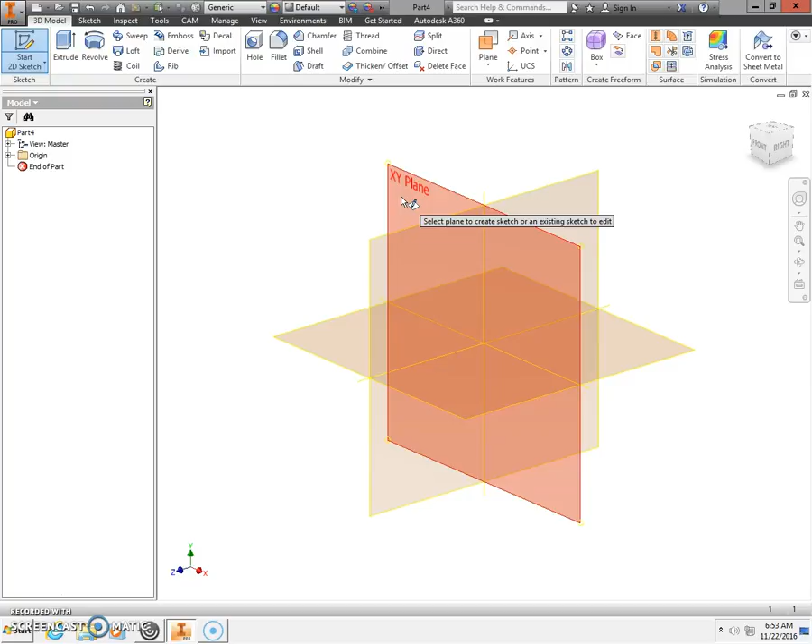Today we're going to create the cover for our iPad amplifier. We're going to begin with New, Standard IPT, and click Create. Select 2D Sketch from the ribbon bar at the top. Place it on your XY plane. We're going to click Front to zoom out.

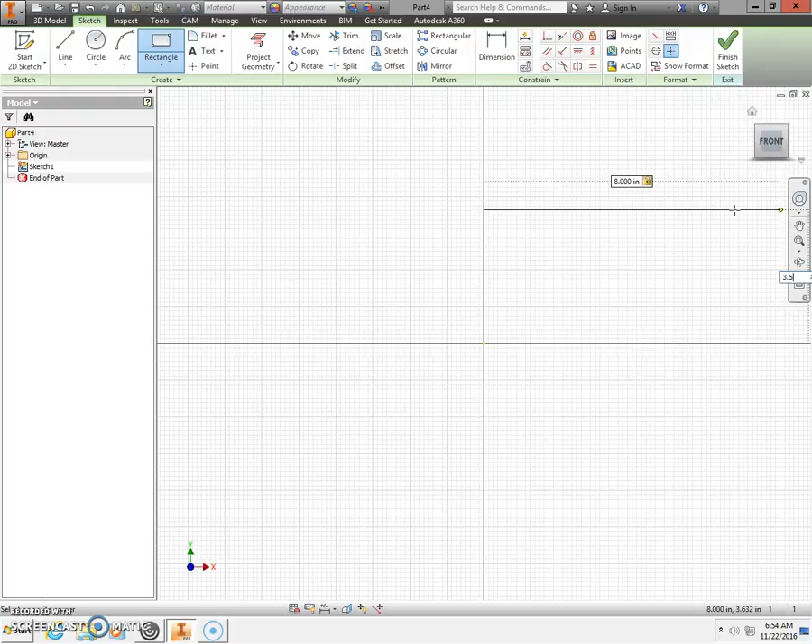I'm going to select my rectangle tool from the ribbon bar at the top. Go to your origin, wait for your green dot, stretch out a rectangle to the upper right hand corner. My horizontal dimension is 8, press the tab key. My vertical dimension is 3.5. Press enter on the keyboard. We're going to finish sketch and go home.

Next we're going to extrude. I want to extrude in direction number 2, and I want to extrude a distance of 1.875, which is 1 7/8 of an inch. And click OK.

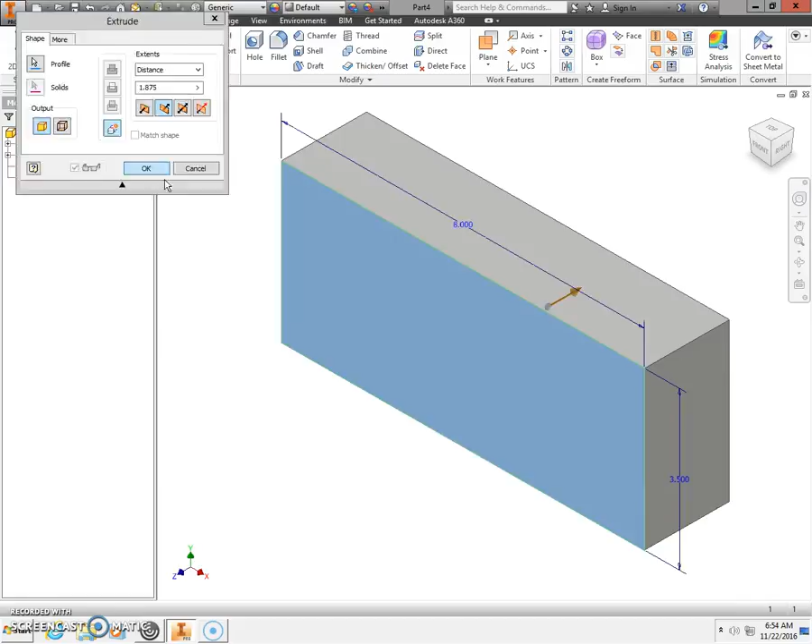Next we're going to take a 2D sketch, place it on our front view, zoom all once again, and I'm going to begin with my rectangle tool. I want to start on the edge of my workpiece. Once that's highlighted, I'm going to stretch a rectangle over to the right hand side. My distance for my horizontal dimension is 8 inches.

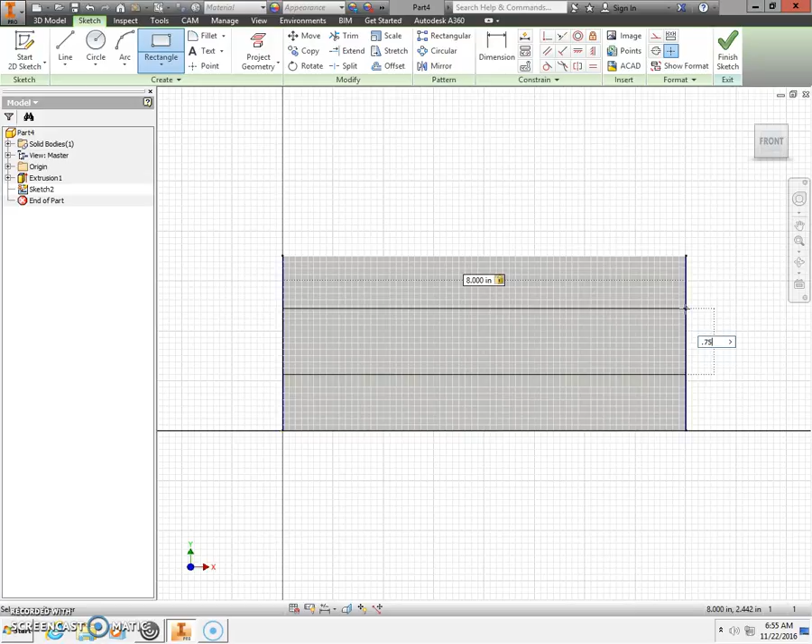Press the tab key. And this next dimension you're going to type in is the width of your iPad and the case together that you measured in class. For mine, 0.75 is what my iPad and case dimension is. Press enter on the keyboard.

Next we're going to locate this, so we're going to click and choose our dimension tool. I want to go from the bottom of the rectangle that we just drew to the bottom of your workpiece. This dimension here is going to be 1.63. Press enter on the keyboard.

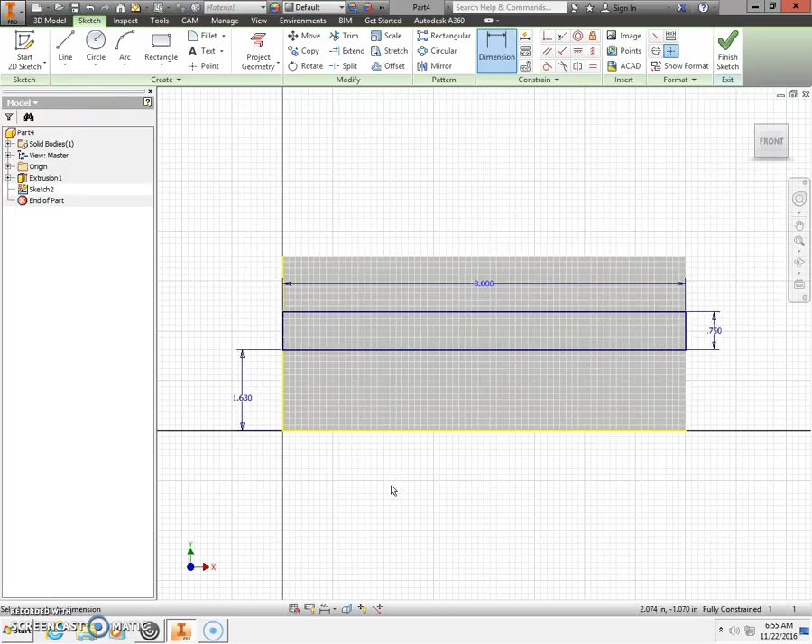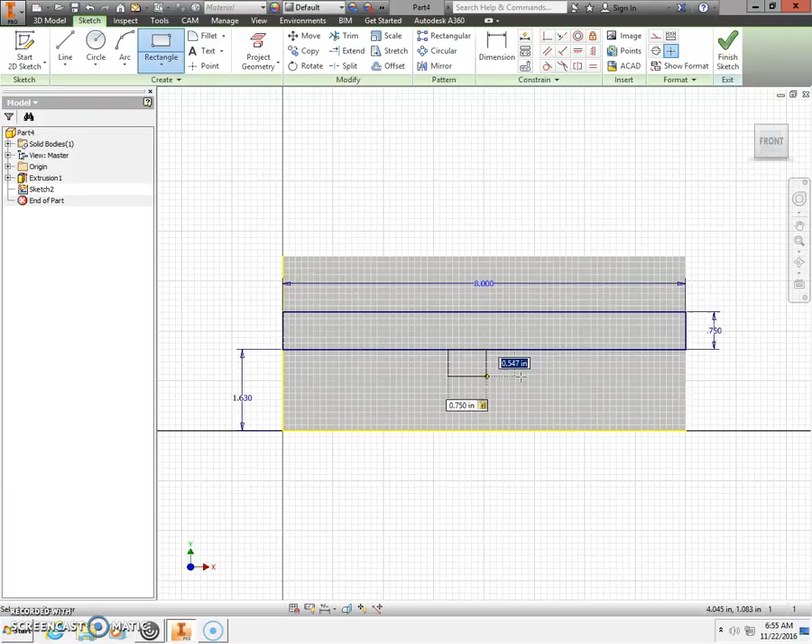Next we're going to have a little finger hole so that we can reach in and touch our home button. I want to start with a rectangle on the bottom edge of the one we drew. This is going to be 0.75. Press the tab key. And it's going to be 0.375, 3/8 of an inch tall. Press enter on the keyboard.

Next we need to locate this rectangle on our workpiece. So I'm going to go from the skinny edge of this rectangle we just drew to the left hand side of our workpiece. Bring this dimension down. This dimension is going to be 3.625, 3 5/8 of an inch, and green check mark.

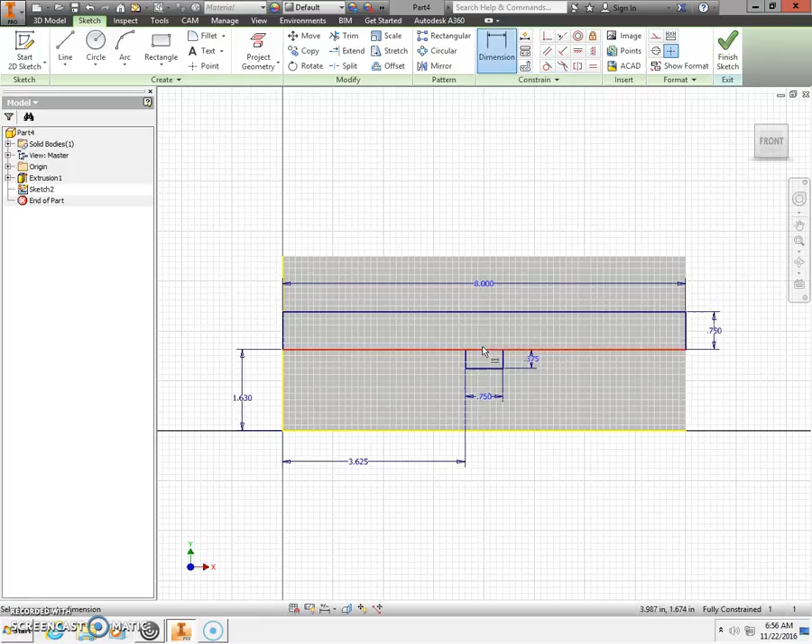Next we're going to trim out this line here so we can run our tool paths. In order to do that, we're going to select trim from the top ribbon bar. When I bring my cursor down and I click a second time to trim this line out, it's going to say that it can't be trimmed because it has a dimension, so I'm going to press cancel.

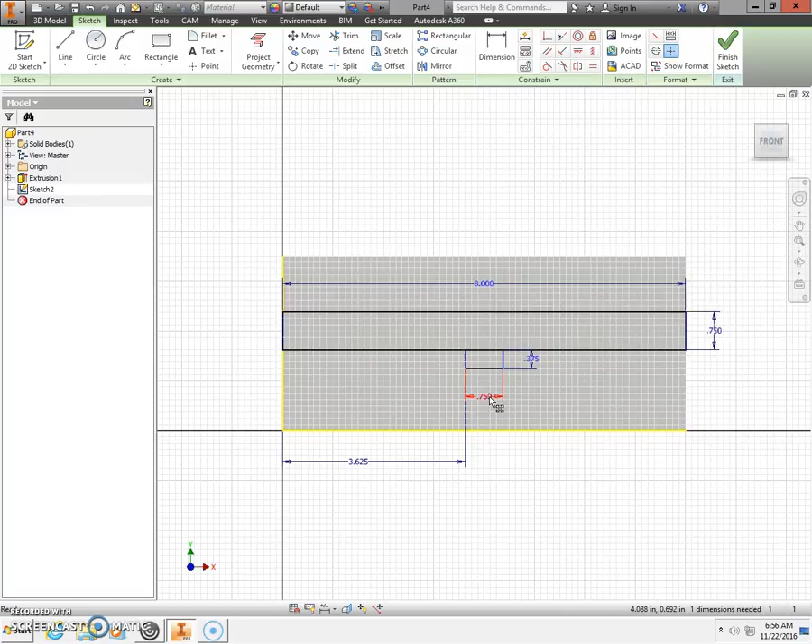Press escape. I want to right click and delete, right click and delete, or you can select your dimension and delete, and now we should be able to trim that line out of there.

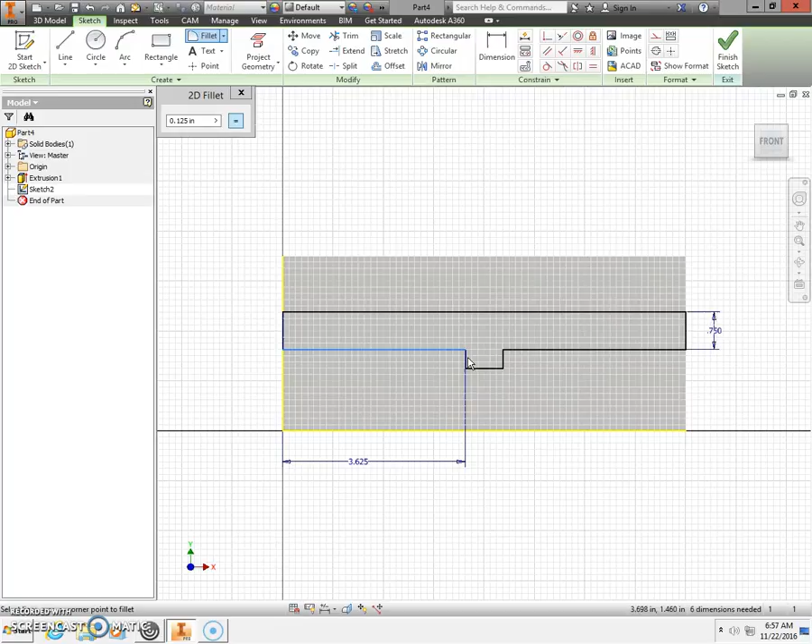Okay, once that line is trimmed, we're going to select our fillet tool from the top. 0.125 radius is fine. I'm going to choose the two lines that intersect here in order to create a fillet, and the two lines on the opposite corner. That looks really good. Click X to get rid of your fillet tool. And then we're going to Finish Sketch.

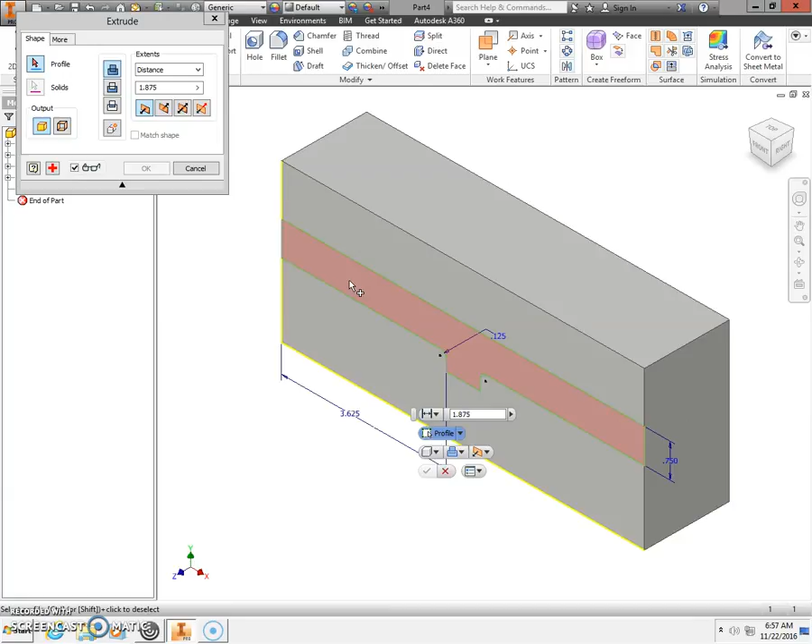We're going to use our Extrude tool. Select this area that we just created. We want to extrude to cut, which is this button here. And I want to cut a distance of 1/2 inch, which is 0.5. Enter in 0.5 up here. Click OK.

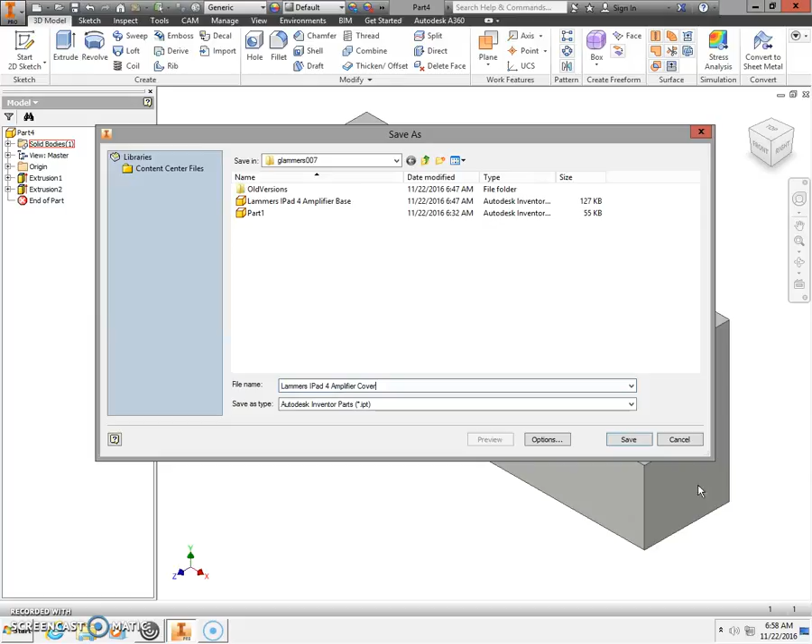Next we're going to go to the orange capital letter I, Save As. Make sure this is going to your H drive, first initial last name 000. And I'm going to type iPad 4 amplifier cover. Click Save. Once it saves, now we're ready to cut or run our tool path.

Above your ribbon, we're going to select the CAM tab, and we're going to choose the Setup folder to set up our workpiece first. Once again, we work these menus on the left-hand side from top to bottom, and we work our tabs left to right. So first we're going to change our origin in the work coordinate system. Origin, we're going to change to model origin.

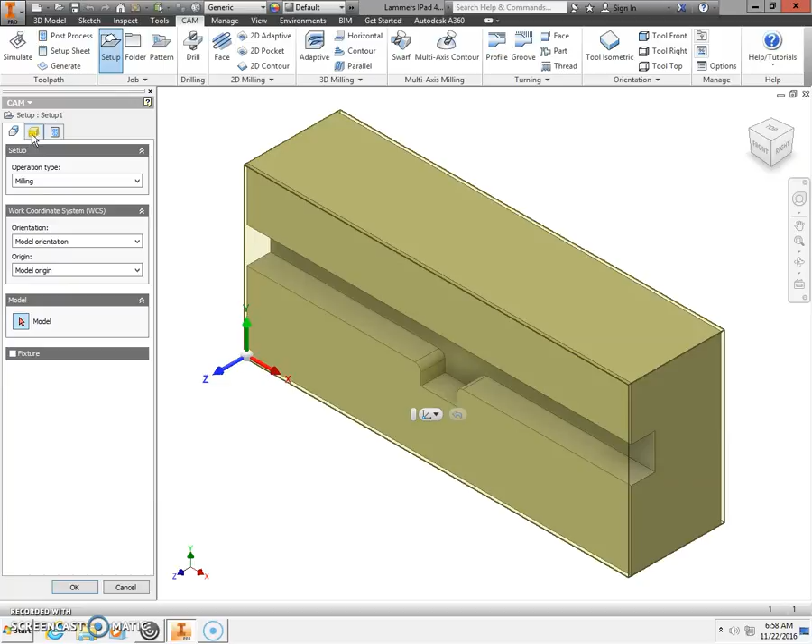I'm going to select my workpiece next, and I want to enter in my workpiece dimension of 1.875, which is 1 7/8 of an inch. Moving across to my post processor tab, my program comment, I'm going to enter in my name and iPad 4 amplifier cover. iPad 4 amplifier cover, and click OK.

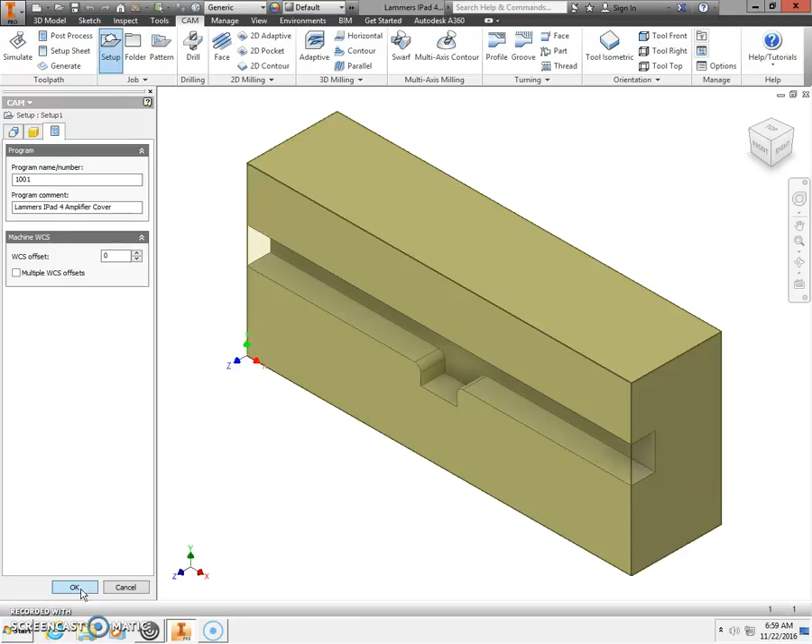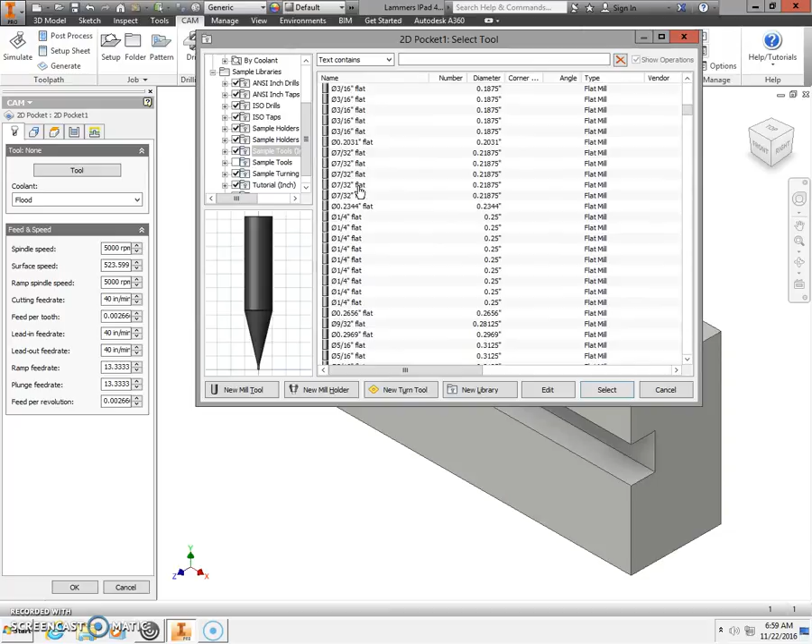Next, I'm going to go to my 2D milling area, and I want to choose 2D pocket. First thing I want to do is select my tool. On the left hand side, I'm going to scroll down until I can find Sample Tools Inch. And in my tool menu, I'm going to scroll down until I find my 1/4 inch flat end mills, and I want to choose 1/4 inch flat, the last one in the list of 1/4 inch flat, and click Select.

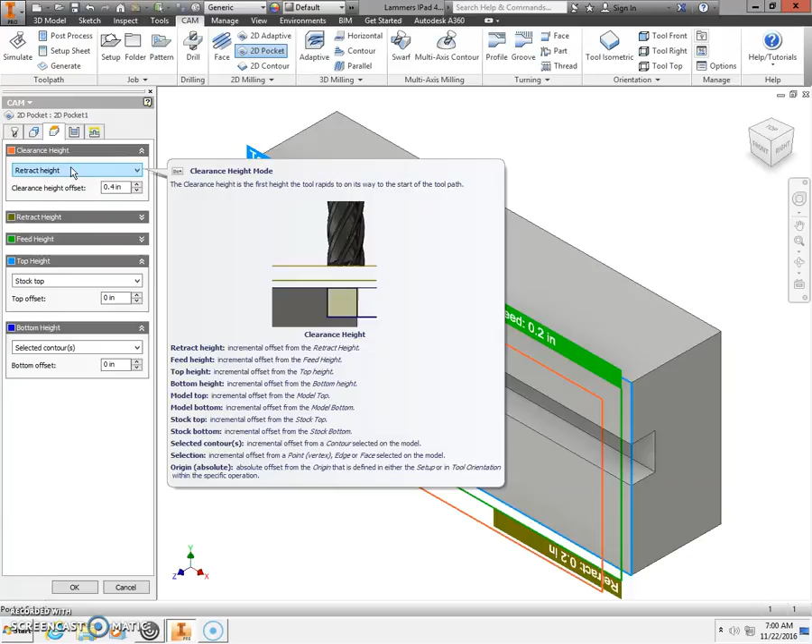Next tab over, I'm going to choose my geometry, and I want to choose the bottom area of this ditch that we created. Moving over, next tab, I'm going to select my heights, and I want to choose my clearance height and change it to stock top. My offset clearance, I'm going to change to 0.2. Let's take a look at retract height. That should be stock top and 0.2. My feed height, I'm going to change to stock top and 0.2.

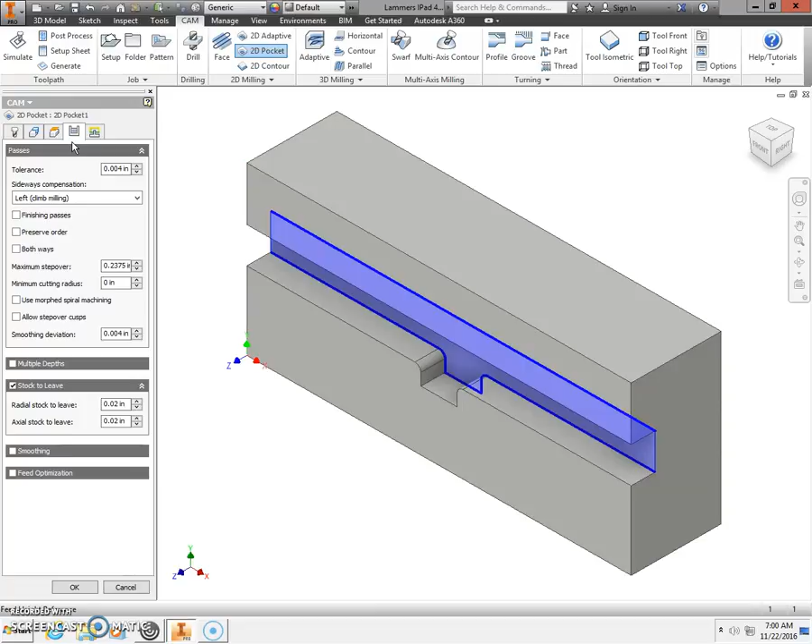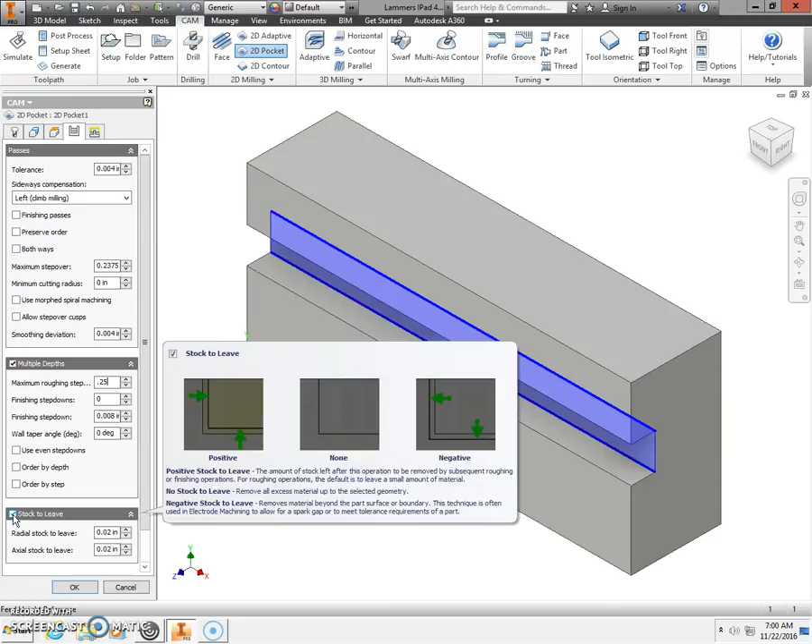Once that's selected, we're going to choose our multiple depths. I'm going to select my multiple depths area, and I want to change my maximum roughing step down. Highlight that, and I'm going to change it to 0.25. And here where it says stock to leave, I'm going to deselect that because I want to go right to our boundary of our extrusion.

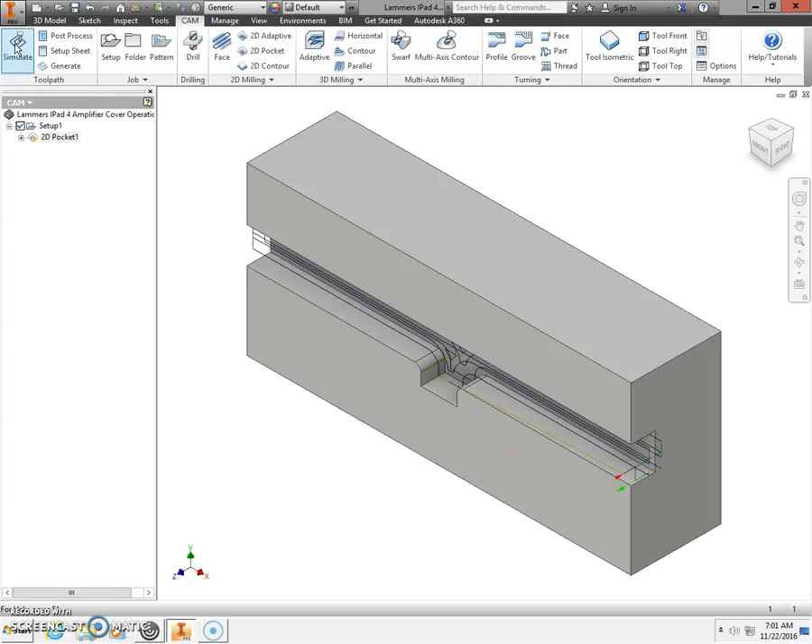Next, I'm going to go to my linking parameters tab. In leads and transitions, I'm going to deselect lead in, deselect lead out, and I'm going to change my ramp style to plunge. After that is selected, click OK. It's going to generate your tool path. You can click on Simulate from the ribbon, click play. Once it's finished running your tool path, click close.

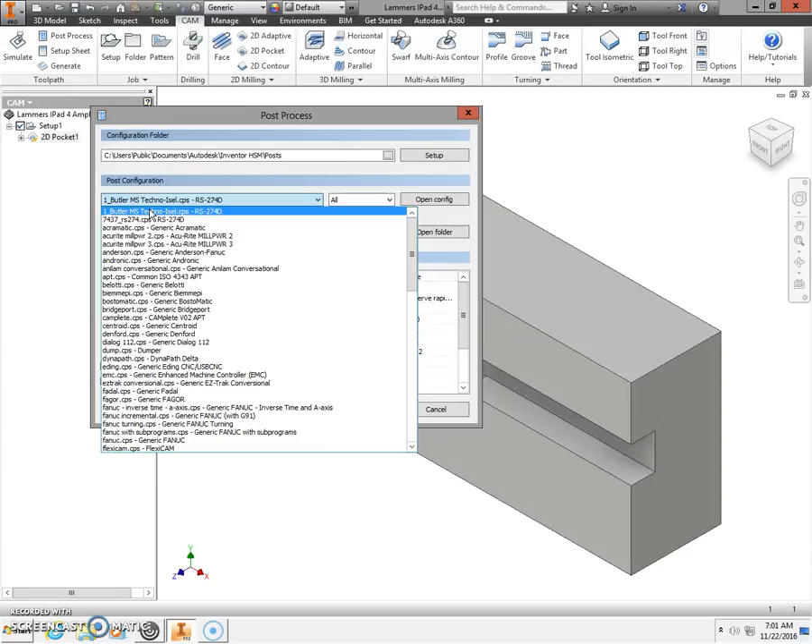Then we're going to choose post process from the menu at the top. Once again, I want to have 1_Butler MS Techno-Isel chosen for my post processor. If you can't find that, or it doesn't come up automatically, it's the top of the list from the pull down menu. Next, I want to choose my H drive, first initial last name 000, click open. In my program comment, I'm going to enter in your name, iPad 4 amplifier cover, and click post.

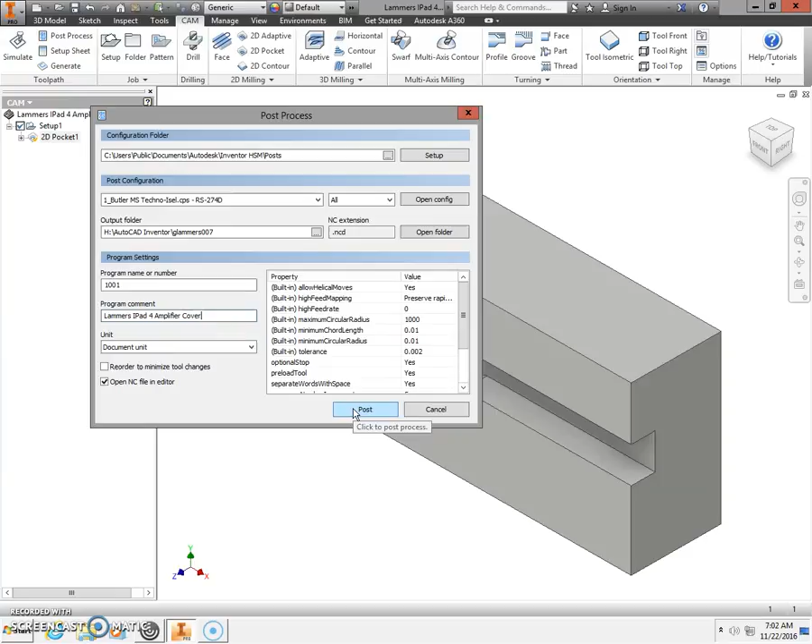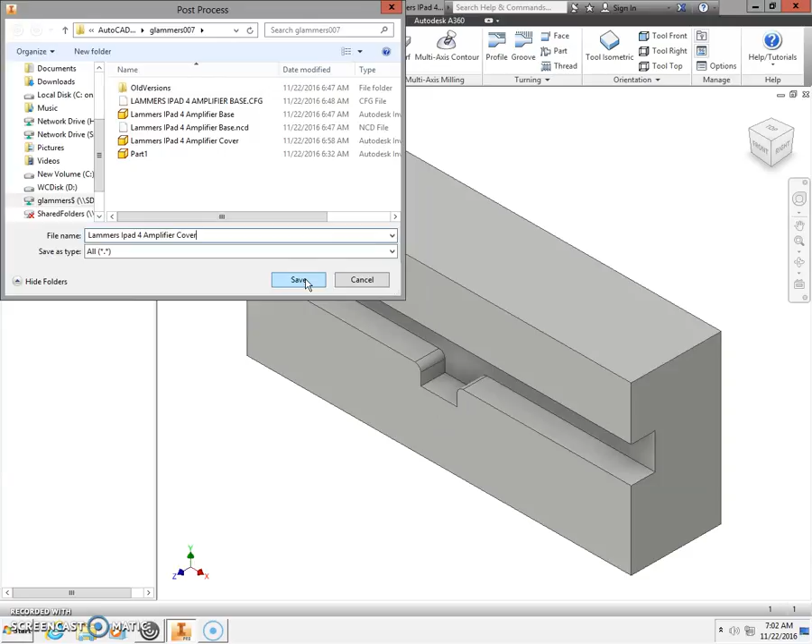Last time again, we're going to enter in your name and iPad 4 amplifier cover, and click save. On the editor file, when it comes up, click X to close that out. I'm going to go to orange capital letter I. I'm going to update and save again.

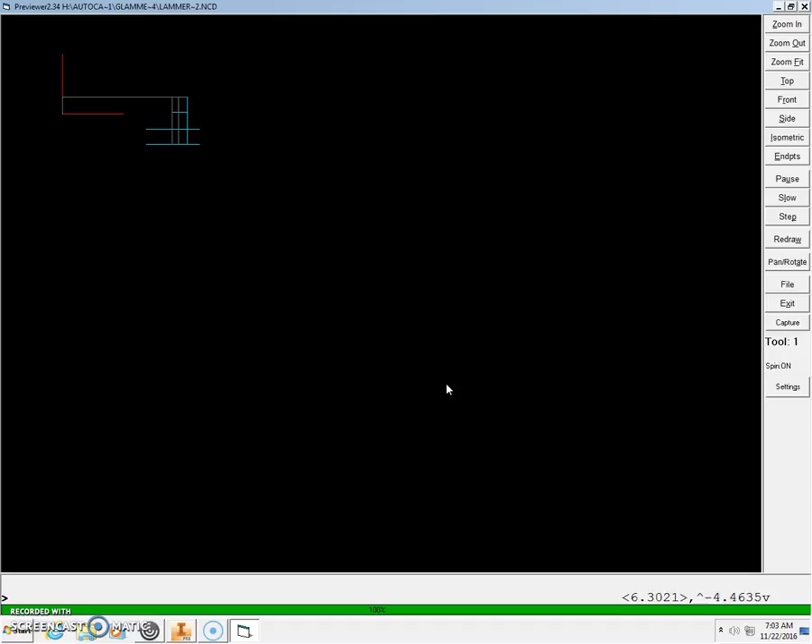I can X out of Inventor, go over to the computer that has the CNC mill connected to it, select CNC mill from the desktop, click Translate Execute. We're going to choose our iPad amplifier cover, click Open, select OK, click Preview. You're going to type the letter S and then F on the keyboard, and this is where you are going to stop, call your teacher over so that they can load the workpiece and take a look at your computer screen. Congratulations, nice job.